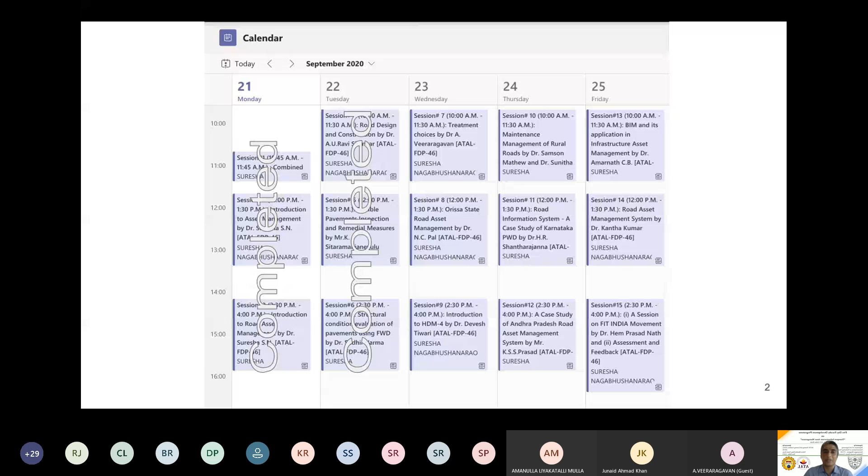So today we have the speaker, Professor Veeraragavan. Dr. A. Veeragavan is currently professor in the Department of Civil Engineering at IIT Madras. He has 4 decades of experience in teaching, research and industrial consultancy. Professor Veeraragavan received the Indian Roads Congress Pandit Jawaharlal Nehru Award in the year 1994 and IRC medals for the best papers in the years 1991, 1993, 1997, 2004, 2008, 2011, and IRC commendation certificates for his highly commended research papers in the years 1992, 1994, 1998, 2000, 2015.

Professor Veeraragavan is a recipient of the UGC Career Award for Young Teachers and the National Award for Promising Engineering College Teacher in India from the Indian Society for Technical Education. He was awarded the Vishwakarma Award under the category Outstanding Academician, Technologist, Scientist, Innovator by the Construction Industry Development Council. He has also received the award for Distinguished Services to the Institute by the IIT Madras Alumni Association. Professor Veeraragavan has published over 100 research papers in journals and over 150 papers in national and international conference proceedings. He has coordinated over 15 major research projects with a budget of over 12 crore Indian rupees.

Currently, he is coordinating, networking with 10 academic institutions, 2 major research projects sponsored by NRIDA on performance evaluation of rural roads with cold bituminous mixes and performance evaluation of rural roads with waste plastics and bituminous mixes, with a total budget of rupees 291.2 lakhs. He has co-authored 4 books on surveying, highway engineering, highway materials and pavement testing, that is 5th edition, by Messrs. Nem Chand and Brothers, and pavement design, pavement drainage, theory and practice by CRC Press, Taylor and Francis Group of UK.

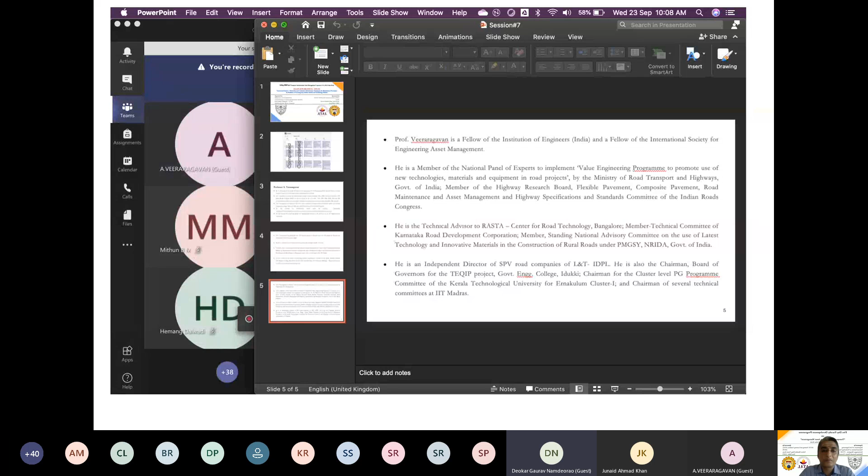So now you can share the screen, sir. Yeah. Are you able to see my screen? Not yet, sir. You may need to minimize the window. Maybe a few minutes back you tried, sir. The same way.

Yes. Oh. Yeah, we can see, sir. Now the slideshow. Is it okay? Yes, sir. Okay. Can I start? Yes, sir.

Yes, sir. Okay. Very good morning to all participants. I'm happy that the importance of road asset management is recognized in the country. All these years we have been constructing the roads, but we were forgetting about how these road assets should be maintained and preserved, so that they will serve the intended purpose.

So the major difference between pavement design and pavement maintenance and management is that in pavement design, we consider a design life. For example, the design life for a bituminous pavement can be 15 years or 20 years, depending upon the category of the road. And for a concrete pavement, it's about 30 years. So the question arises, what is this design life I am talking about?

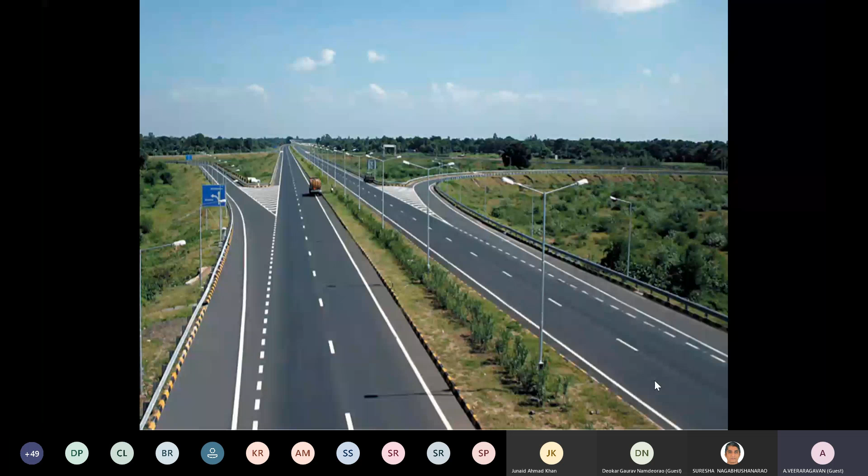Similarly, we do have beautiful highways. Again, this is between Chennai and Bangalore, Krishnagiri, constructed by L&T. We do have beautiful highways like this. Even rural roads are very good today. As you know, a flexible pavement consists of different layers, starting from the embankment, subgrade, subbase, base course, binder course, and the wearing course.

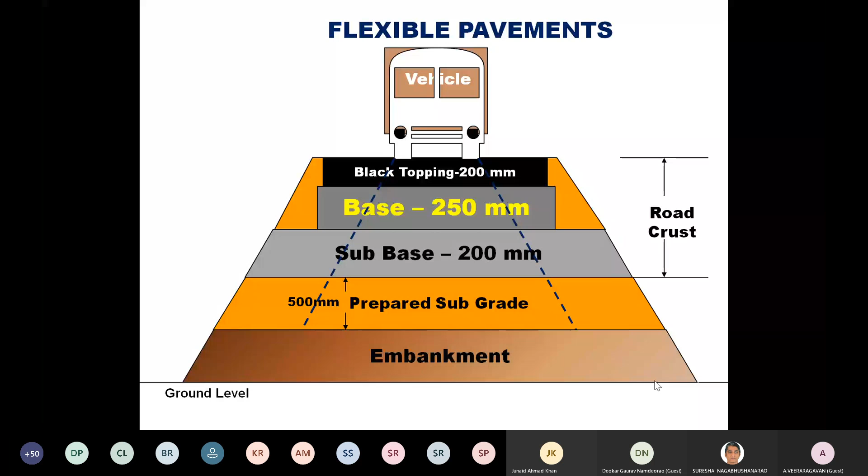What I'm going to talk about today is not the lower layers, the embankment, subgrade, subbase, or base course. I'm not going to talk about those. What I will talk to you about today will be only the blacktop or the bituminous layers. Even though it looks to be one blacktop, this again consists of two different layers. You have a binder course and you have a wearing course. Even though when I say blacktop, both look black, the bottom layer has a different function. The top layer has a different function, even though we call it the blacktop. The function of the bottom layer is that it should be subject to more fatigue.

So you should be able to resist the fatigue, so the material should be more flexible. Whereas the top layer that you provide should be stiff enough because the stresses are coming on the top here. So this load stress gets transmitted to the binder course, to the base course, to the subbase, and to the subgrade eventually. So the function of the top layer should be to resist the high load, higher tire pressure, so that rutting will not take place. So the top layer should be a rut resisting layer, and the bottom layer should be a fatigue resisting layer.

But you will find in pavement materials characterization or in pavement design, they consider the same modulus for both the layers. They consider both materials to be the same. They are considered to be HMA, hot mix asphalt, but the functions are different. As can be seen here, the top layer is a rut resisting layer and the bottom is a fatigue resisting layer. So we consider the bottom radial tensile strain as the criterion to resist the bottom-up crack.

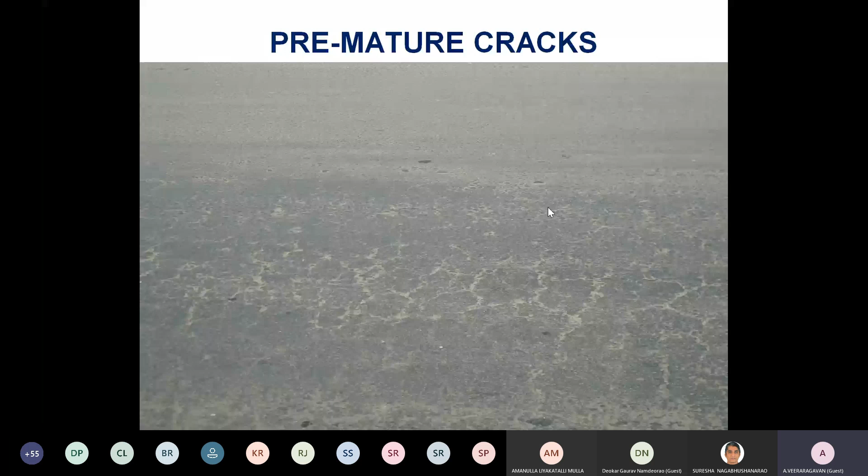This crack will not be a bottom-up crack. You can ask me a question, how do you know that this is a top-down crack and not a bottom-up crack? What you should do is take a core. Once you take a core, you'll find the cracks are confined only to the top, maybe 10, 15, 20, 30, 40 millimeters, beyond which the cracks are not there. You'll see the crack here, take a core, find the cracks are only here.

So why I'm bringing this up is that all cracks are not alligator cracks. All cracks are not map cracks. So all cracks are not fatigue cracks. This may be because of the aging of the bitumen on the top. Maybe because of higher load, higher pressure. That means the treatment to a pavement which has developed a bottom-up crack is different from the treatment to a top-down crack.

So ideally, once you find the cracks, you can seal the crack, but that will prevent the entry of water. Once the water enters, because of hydrostatic pressure that's coming on the surface, it will strip off the bitumen from the aggregates, and then that results in the forming of potholes and other distresses. So this becomes a candidate project for recycling.

What I will do is mill the layer up to the depth to which the crack has propagated, maybe 30 millimeters, 40 millimeters, 50 millimeters. I can recycle the material, rejuvenate it, and lay it back. That way, I am making use of the already constructed or used aggregate and binder. Some binder would have aged. Now I have to rejuvenate the bitumen, and then I can lay it back.

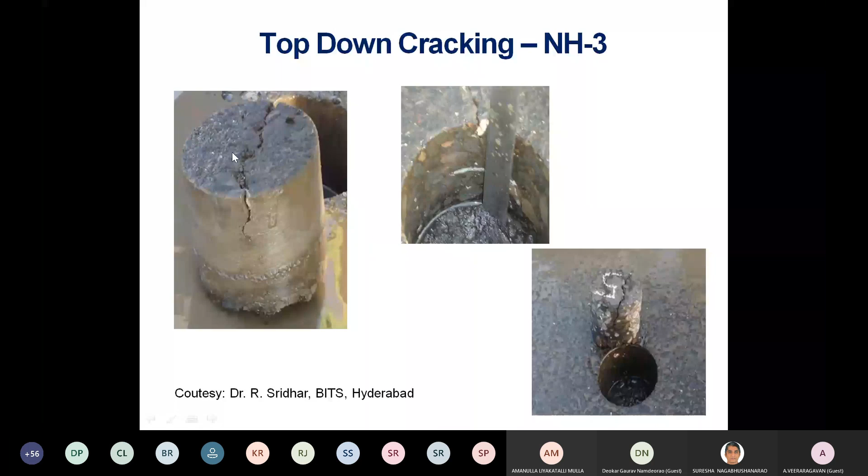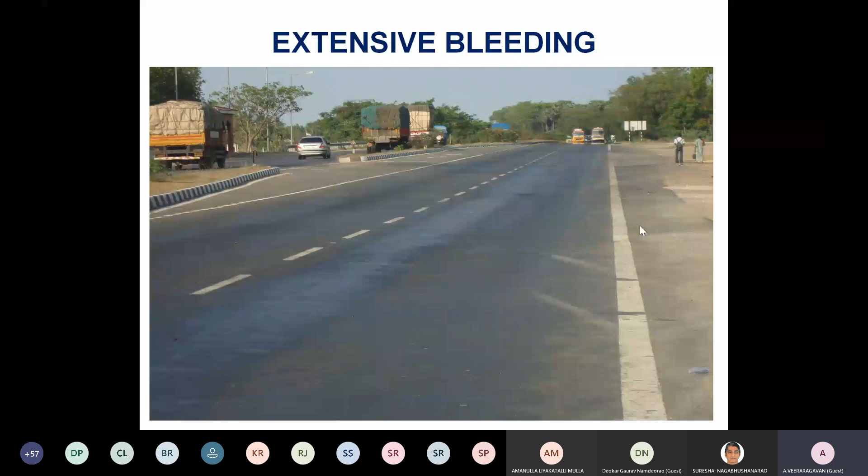All these distresses which I'm showing are before the end of the design life. This again may be because of the binder, maybe because of the density and voids in the bituminous mix, maybe because of overloading. Many factors will contribute to extensive bleeding on the surface. You will also find shear deformation. This is in a ghat section between Krishnagiri and Salem in Tamil Nadu. It's a ghat section, climbing lane. You'll find that the aggregate mixes have sheared off. So what mix is to be used? That is the treatment. What treatment should I do for this is what we will see today.

Also, this is the fatigue cracking which I'm talking about, because of excessive radial tensile strain at the bottom of the bituminous layer. Fatigue cracking can occur. So in a nutshell, a pavement which is good or excellent initially will start deteriorating with the passage of time, with the passage of traffic. The rate of deterioration of the pavement is slow initially for a few years. Then it starts deteriorating, and the rate of deterioration becomes faster beyond a certain stage.

So the treatments that you can consider to maintain the road are, first, preventive maintenance. Then comes minor rehabilitation. Then comes major rehabilitation. Then comes reconstruction. When you do maintenance to your pavement in a good structural condition, it is called preventive maintenance. When the pavement condition goes from good to fair, then it needs a minor rehabilitation. Minor in the sense, thickness less than 40 millimeter. Beyond that, when the pavement starts deteriorating, it warrants a major rehabilitation, which means thicker than 40 millimeter. What material, we'll see that.

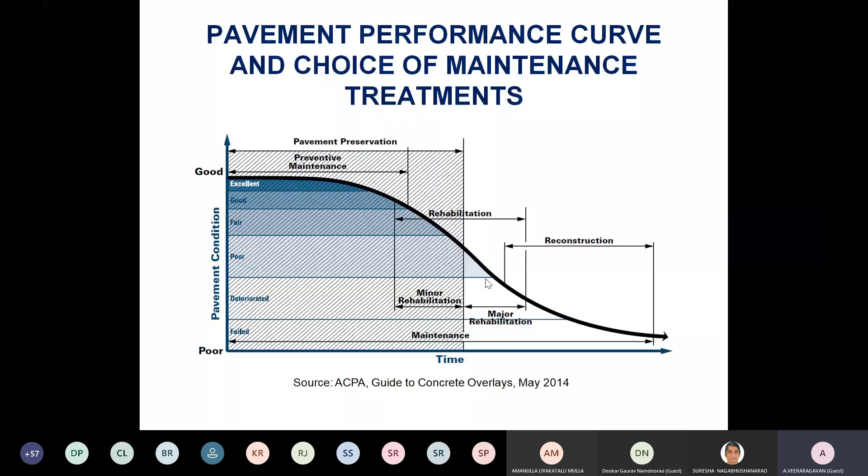When you talk about the bituminous mixes and bituminous layers, they have to serve different functions. Number one, they should offer a high resistance to deformation. So that's what we are talking about. The top layer which I am providing should be able to withstand and offer resistance to deformation. It should be a rut resisting layer. So what is a rut resisting layer? We'll see. Secondly, the layer should be able to offer high resistance to fatigue.

This material should be able to withstand high strain values, where a truck may carry 8 ton, 12 ton axle load, 14 ton axle load, 20 ton axle load, 28 ton axle load. So the strain values become more. With heavier and heavier loads, more is the strain and lesser is the life. So for bituminous layers, one should be able to withstand the deformation. They should be able to withstand the fatigue. And you should also be able to reduce the stresses as you go below. Fourthly, the top layer, when it is exposed to the atmosphere, the top few millimeters of the layer will become aged, become stiff. And when you apply a heavy stress on that, this layer will start developing cracks.

That is a top-down crack which I am talking about. Because of environmental factors, the layer will be subjected to degradation and can develop a crack. And most importantly, this layer should not let the water go through, which means this mix should be a dense graded mix. A well-graded material should be provided as much as possible. One exception is a gap graded mix.

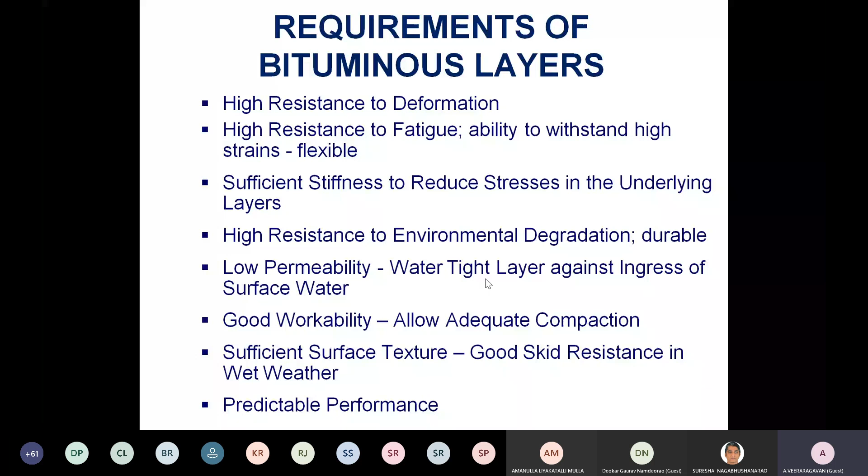As the pavements start deteriorating, what I do here is preventive maintenance. Later I do maintenance and rehabilitation. This preventive maintenance has different types. I'll touch upon what the different types of preventive maintenance are. Initially, for a highway pavement, we do routine maintenance. Routine maintenance is supposed to be done all through the year, 365 days. Now, they don't do it, that's a different issue.

Routine maintenance includes crack sealing, filling up of the potholes, shoulder dressing, and drain desilting. These works are to be done all through the year, which is called routine maintenance. Even though you do routine maintenance, because of wear and tear, some potholes may form, some raveling may take place, which means a pavement has to be resurfaced. So that is resurfacing. Remember, routine maintenance and resurfacing will not improve the structural condition of the pavement. Even though you do the resurfacing, because of fatigue effects and other parameters, the pavement will warrant a minor rehabilitation. Minor in the sense a 40 millimeter thick treatment. So that is a minor rehabilitation.

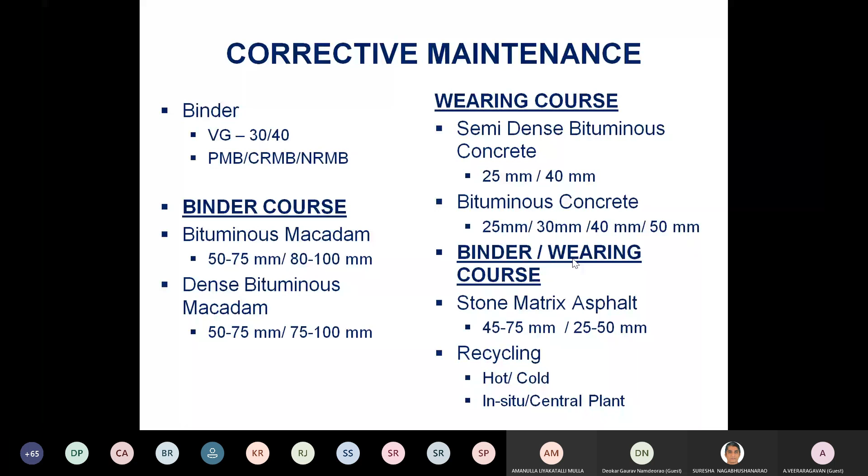In addition, when you find top-down cracking or raveling, you can go in for recycling. It's again a corrective maintenance treatment, which can be hot mix or cold mix. Again, it can be done in situ, or it can be taken to a central plant, mixed, and brought back. So these are the choices of corrective maintenance treatment available to you.

Generally, in a granular layer, there should be two aggregates, one above the other. But in the case of dense bituminous mixes, we require a minimum of 3 aggregates, one above the other, preferably 4. So if T is the thickness of a given layer, the maximum size of aggregate can be T by 3, preferably T by 4.

So once you reduce the aggregate sizes, surface area becomes more, binder contents become more. So what is the issue here? When you have a 75 millimeter thick layer with a nominal maximum aggregate size of 37.5, only 2 aggregates can be there, one above the other. The mix cannot be a dense mix. Therefore, you will find segregation problem in the case of DBM grade 1.

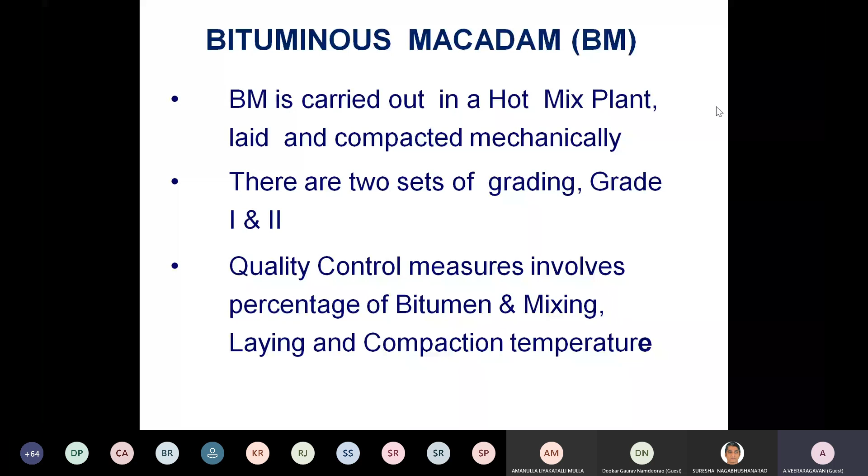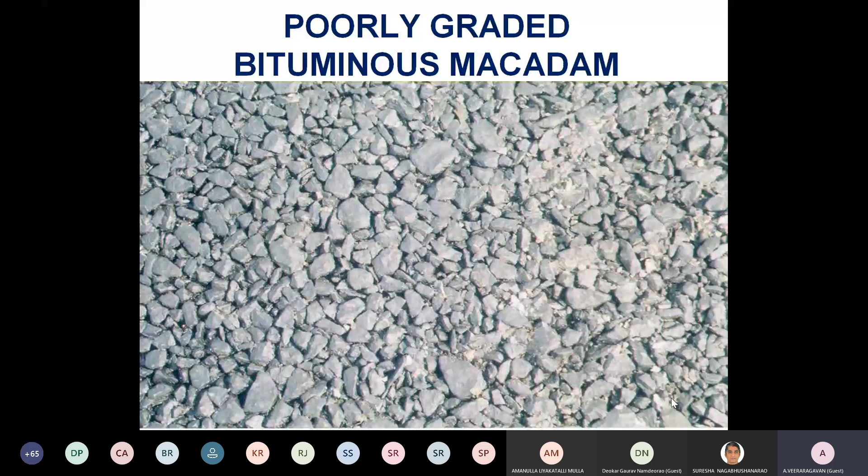BM is carried out in a hot mix plant and compacted mechanically, but unfortunately there is no mix design. The check is only on gradation and on the binder content. Binder content is low, 3.3 to 3.4. So people prefer this, but the voids are more. Imagine a bituminous mix with more voids. You take a glass of water and pour it on this, and the entire water will get in. That is not a good mix. So you will not get a dense mix if you provide a bituminous macadam. You'll find that the voids may be of the order of more than 10%.

This is grading 1. Even when you take grading 2, the voids become more. Therefore, even if you consider load carrying capacity, assume that I apply a load and measure the strain here. When you compare the load distribution within this, because of too many voids, they are not effective. So if you look at the equivalency, then you'll find that instead of providing 150 millimeter of a water bound macadam or a granular layer, you may have to provide 10 centimeter of a bituminous macadam. It's not cost effective. The cost of this will be more than 5,000 to 6,000 rupees per cubic meter. So why Indian roads are bad is because we adopt these open graded or high void mixes.

So what is to be done? We have to go in for dense bituminous layers. So DBM layers consist of coarse aggregate, fine aggregate and filler. There's a mix design. Binder content is fixed. Minimum values are prescribed. There is a volumetric analysis. There's a test on moisture susceptibility. With this result, instead of a BM, you can go in for a dense bituminous macadam. It's usually used as a base course or a binder course.

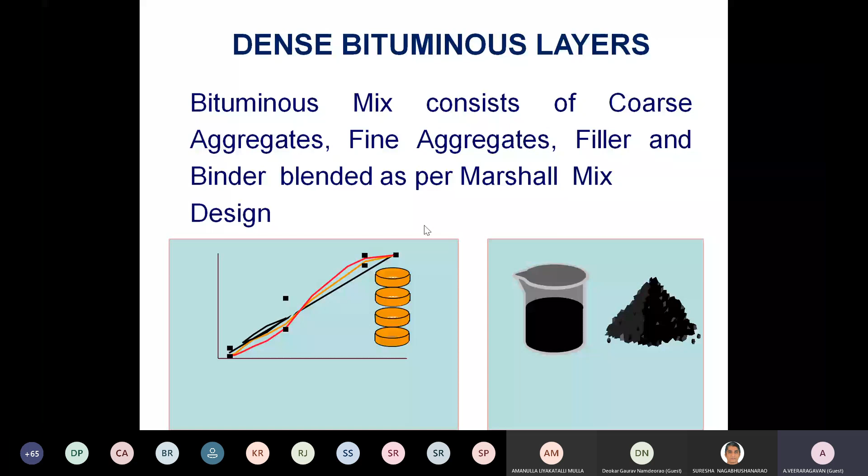And whenever you want to provide a profile corrective course, for example, I have a 2-lane highway. It has a camber on both sides. Now I want to convert this 2-lane into a 4-lane, which means I'm making this into a unidirectional camber. In that case, there will be a wedge. What material will you use to fill the wedge? If you ask an engineer, he'll say, I will use BM. But the BM that you're going to provide will be like this. All the water that gets in near the median will get accumulated here, and that causes premature cracks on the surface. Therefore, the profile corrective course should only be dense bituminous macadam.

It can be constructed in single layers or multiple layers. Thicknesses vary from 50 millimeter to 100 millimeter. Again, it is closely graded. Used as the binder course for heavily trafficked highways. We use cement or lime.

Out of these two, the added value of cement is very, very less. It's not that mandatorily you should use cement. But if the aggregate has got a water absorption slightly higher, to prevent stripping, you can add hydrated lime. If we add minimum 2% lime, the performance of the bituminous mix will be much, much better. So hydrated lime can be used if the mix fails to meet the water sensitivity requirements.

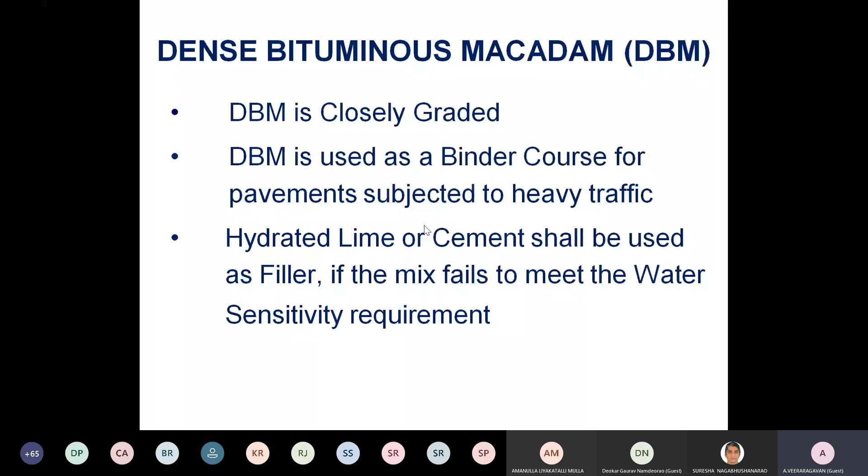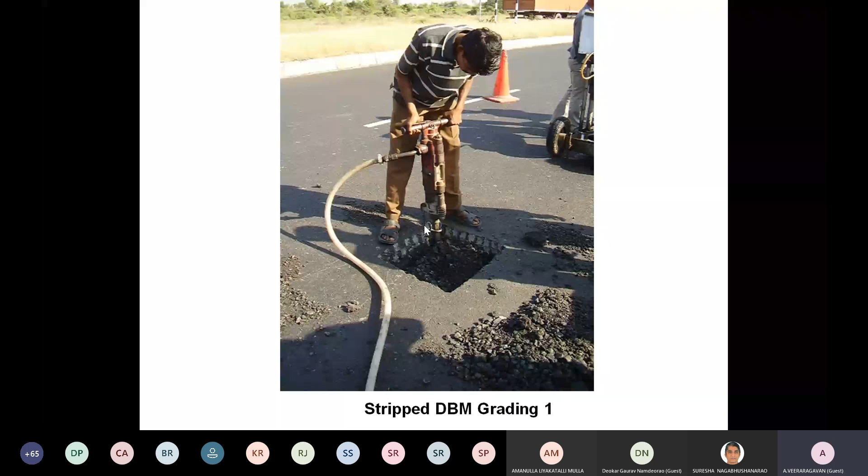So that's what I was telling about the DBM grade 1. Again, a lot of segregation can occur. Take a glass of water and pour, the water will get into this DBM layer. Therefore, whenever you try to find a premature failure, you take a core from that, take a cut, make a trial pit, and then you'll find that there is no bitumen on the aggregates where they have gone. This again is an indication of too much segregation. Water gets in because of the pervious mix in the top layer, and you'll find that aggregates look like granular layer. Extensive stripping will take place.

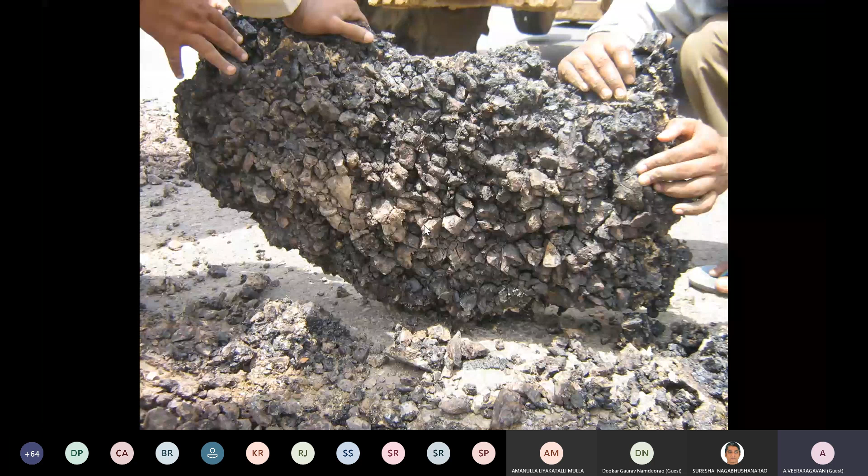Therefore, to make life simple, you can consider DBM grade 2 to be the preferred binder course for highly trafficked highways. Again, the in-place voids, to what voids I should compact. So if you have got 25 millimeter, 19 millimeter aggregate, the void is 8%, you'll find that permeability is of the order of 1200 plus. So gradation, nominal maximum aggregate size, and the in-place voids play an important role on the permeability of the mix. Therefore, DBM grade 2 can be considered to be the treatment choice for the binder course.

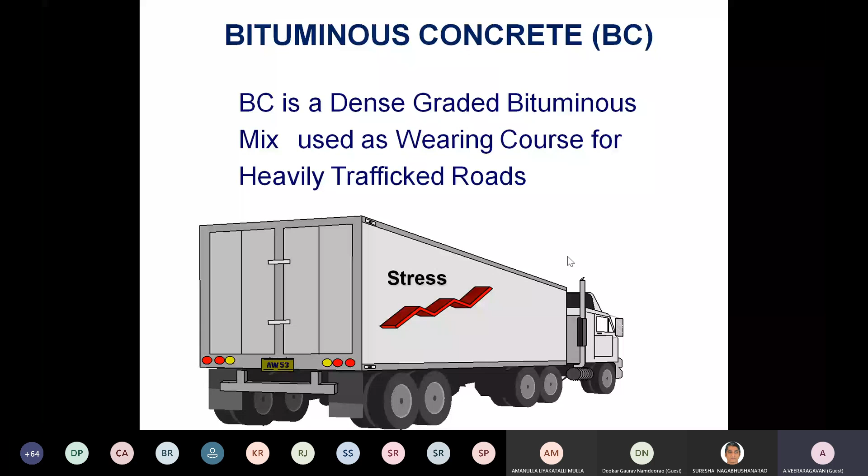When it comes to a wearing course, we can go in for a bituminous concrete, which is again a dense graded bituminous concrete, a wearing course for heavily trafficked roads. The quality control involves the mix design to be done. Gradation is there. And as I was mentioning earlier, you have fixed gradation for the BC, binder content 5.2 or 5.4. We can do the mix design in the laboratory, check the optimal binder content corresponding to 4% voids. We can check the mixing, laying, compaction temperature. We can check the density, stability, flow, voids, retained stability, binder content, gradation. Therefore, it is possible to ensure a better quality construction if you adopt such dense graded mixes like bituminous concrete.

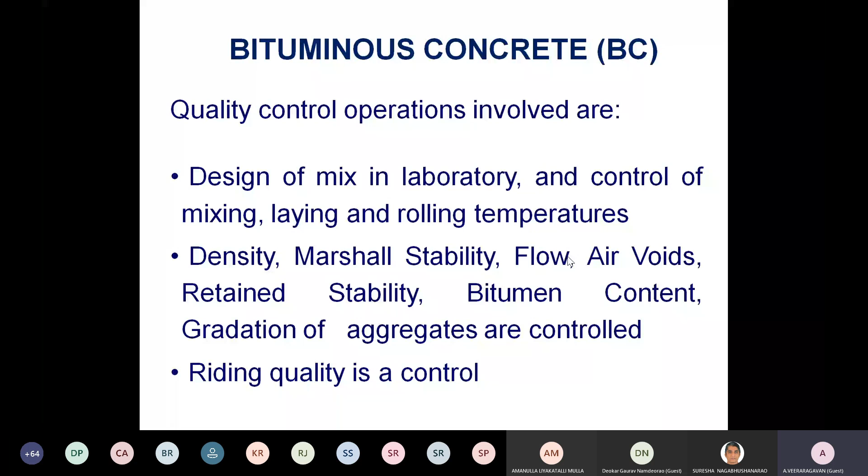Riding quality is also important here. Even though the ministry has deleted the semi-dense bituminous concrete up to 10 MSA, we feel that we can still adopt semi-dense bituminous concrete. The Indian Roads Congress specifications are still available for SDBC. So I also feel that for low volume roads like rural roads, where the traffic is of the order of 5 million standard axles, 2 million standard axles during the design life, SDBC can be laid directly over a wet mix macadam as the wearing course of thickness 25, 30 or 40 millimeter, and this will be much better than open graded mixes.

So there are requirements of the volumetrics as well as the requirements of the mix. The minimum value of stability is 9 kilonewton, and if we use a modified binder, it should be 12 or 10. Flow values, Marshall quotient, air voids 3 to 5, approximately 4 is the average that we consider. Similarly, voids in the mix also play an important role. So you should do a mix design, select the appropriate gradation, find out the optimal binder content, check the flow, check the voids, and ensure that VFB and VMA also follow the required specifications. If the VMA is too high it also causes problems; it may meet other requirements, but it may not meet the VMA and the VFB requirements. They also are important for ensuring satisfactory performance of the pavement.

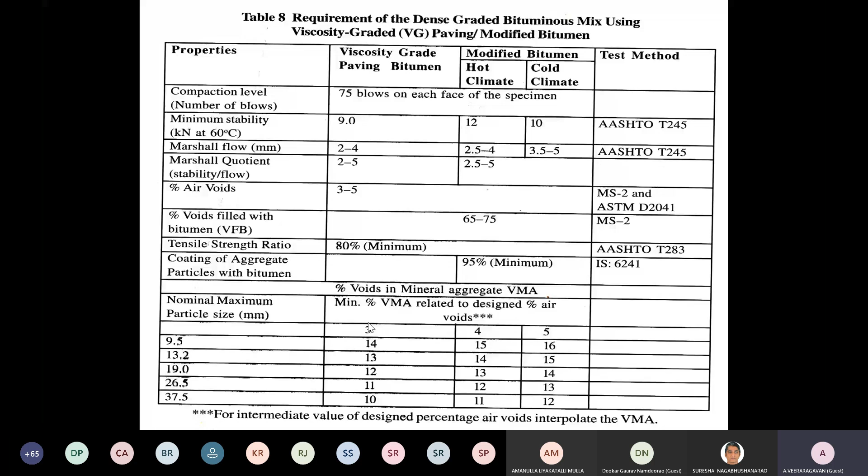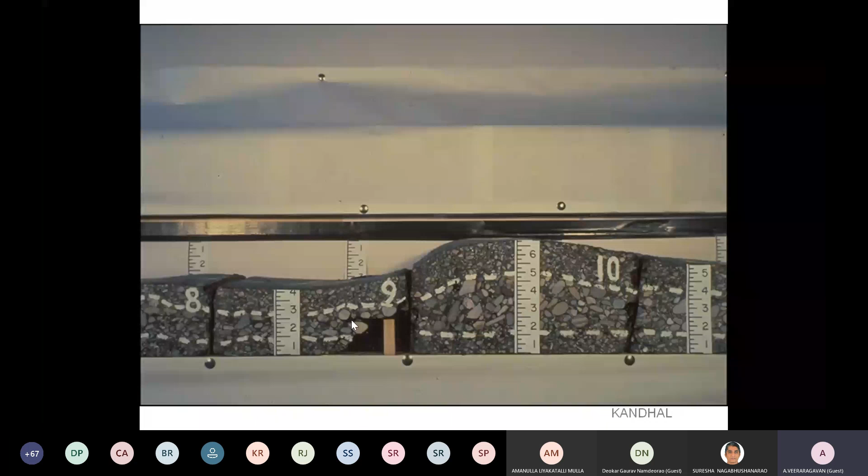So when I say that such shear deformation is taking place in a BC, understand BC will not be able to withstand higher shear resistance. Therefore, we need a different mix to prevent this. Rutting and shoving is also from the same section which I'm talking about, because of the poor bituminous concrete mix. In some cases, if you adopt DBM as the binder course, you can find the top wearing course looks intact, but you'll find the binder course has sheared off. Because of aggregate shapes, you find that they are more rounded, they are not angular. So aggregate shape also plays an important role. If your binder course has too many voids, it can again shear off. It need not be contributed only to the wearing course. Any mix that you construct, if you have too many voids, it will eventually crack.

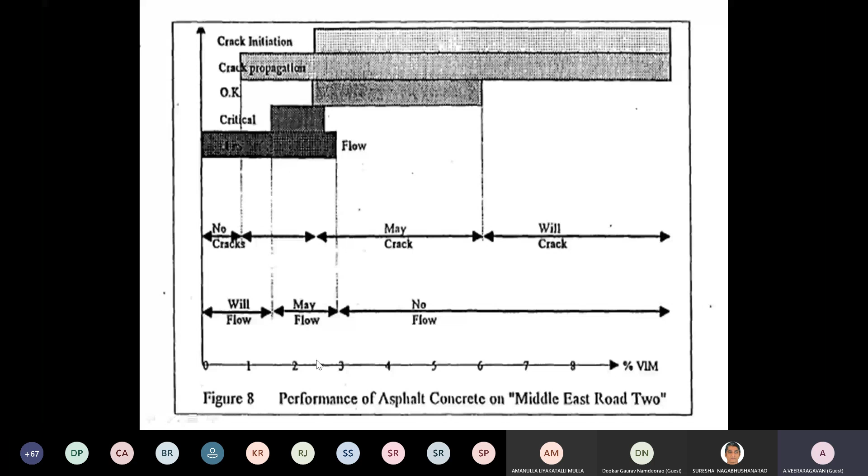Too less of a void, it may not crack, but it will flow, it will bleed. So now you have to strike a balance between cracking and bleeding. You'll find that whenever the mixes had too less a void, it resulted in rutting. Too high a void, there's no rutting, but water can get in and may result in cracking.

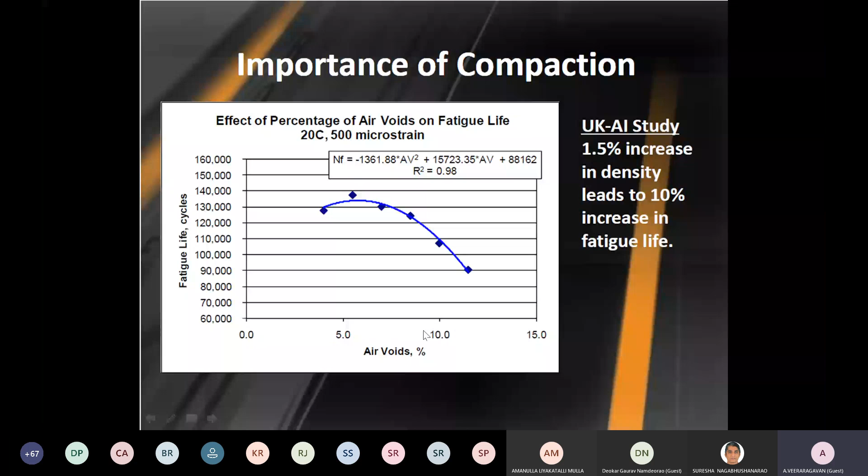Therefore, a hot bituminous mix should be compacted to approximately 7 to 8% voids initially. What I mean is 93% of the theoretical maximum density with around 7% voids initially. So these voids will decrease and you should never go below 4% during the design life of 15 years or 20 years. Compaction plays an important role. So if you find that the voids are around 5%, 6%, then the fatigue life is also more. So don't have too much of voids, that will decrease the fatigue life of the mixes.

Therefore, the solution that we should consider for a wearing course and a binder course is a stone matrix asphalt. So this stone matrix asphalt is a gap graded mix, a rut resisting mix. It consists of high quality aggregates. It has an asphalt rich mortar, mineral fillers, as well as cellulose fibers. When you use this mix, it forms a coarse aggregate skeleton and an asphalt binder rich mortar. So there's an aggregate to aggregate contact, stone to stone contact. With the result, performance will be a rut resistant mix. That's how an SMA will look like.

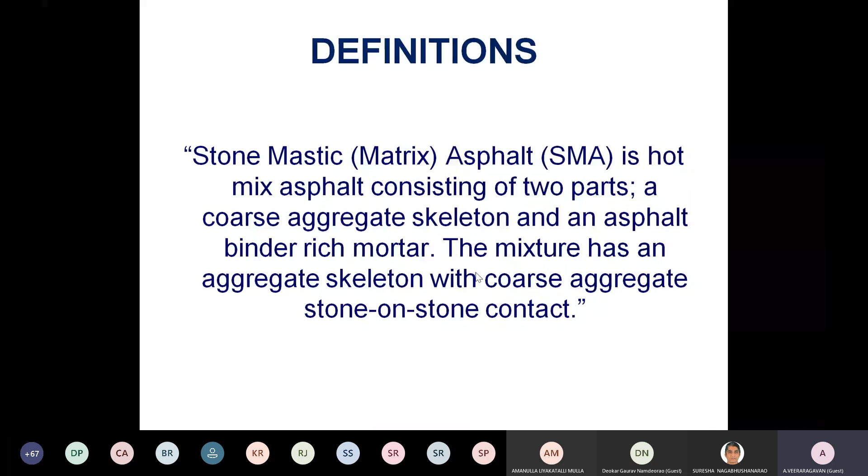So you'll find a rut resisting mix, very high skid resistance, reduced water spray, noise reduction is also possible, and a durable mix. Even in the case of airfield runway pavements, the taxiways where the aircraft crawls at a very low speed and it waits for clearance to take off. When the aircraft leaves the airport to take off, when the fuel tank is full and the load is more, the aircraft crawls along the taxiway and waits for the takeoff. You'll find rutting all along that taxiway. When the aircraft lands, the fuel is already burnt, the load is less. And the exit taxiway will not be subjected to a very heavy load application like the taxiway that is leading to the runway. In such cases, the preferred mix treatment is a SMA.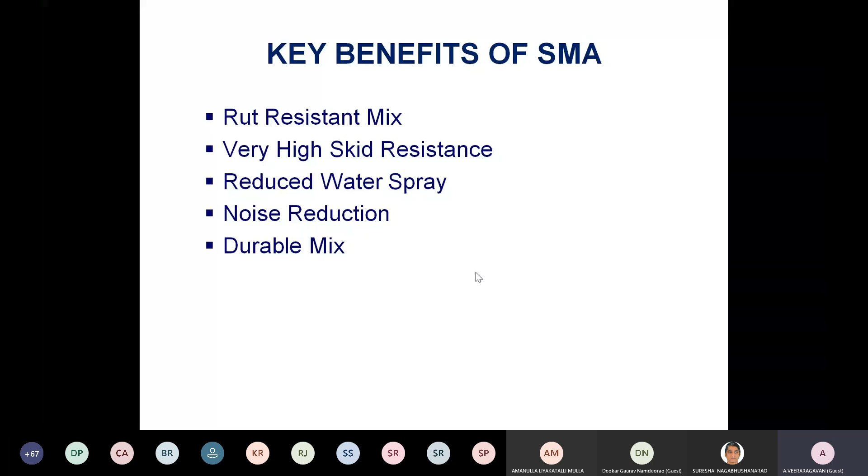Composition, again two gradations, one passing through 13 and one passing through 19. This can be used as a binder course for heavily trafficked roads. There are highways which carry more than 30,000 trucks per day, heavily loaded, going for SMA binder course. If the traffic is less, but still you want a rut resisting mix like the Nagpur Mumbai expressway, where the speed is 150 kilometers per hour, go in for SMA of 13 millimeter with a nominal maximum aggregate size of 13 millimeter. So this is how you have to choose the appropriate treatment.

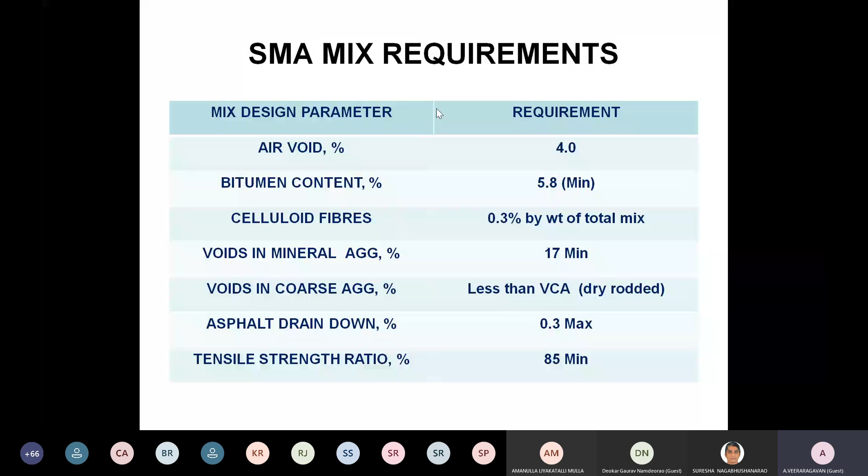The requirements: air voids is 4%, minimum binder content is 5.8%, draindown should be 0.3 maximum percent, and the tensile strength ratio should be 85 minimum. So this is again the requirements. The mix design has to be carried out. So if there is no fiber, all the binder will flow because fines are less. But once you add the fiber, the binder flowing out will be very, very less. Therefore, there is a need to add cellulose fibers to this. That's how an SMA mix will look like.

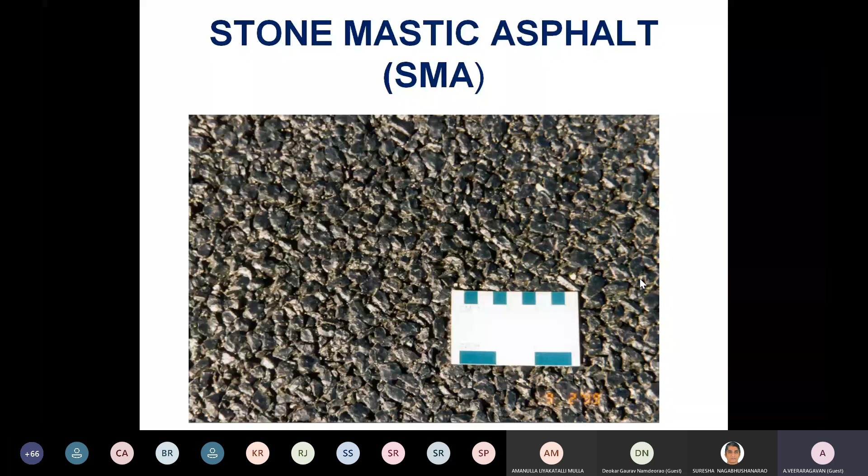So to make life simple, binder course is a SMA grade 2. Surface course can be bituminous concrete, maybe 40 millimeter or 50 millimeter or 30 millimeter. Or you can go in for SMA grade 1 or grade 2 as a binder course or a wearing course. These are the choices available to you for a long lasting pavement. This is how your surface will look like after the rut test.

Now, let us come to thin bituminous surfacing choices. We conventionally use this PMC. It's also called open graded premix carpet, OGPC. When the term itself says it is open graded, then you can ask me, you just now told us you should adopt a dense graded mix, but you're now talking about open graded premix carpet. Yes, why Indian roads are bad is because we adopt such open graded premix layers. It is a single size gradation, maybe 13.2 and 11.2. So if you take a glass of water and pour on this, the water will get into that.

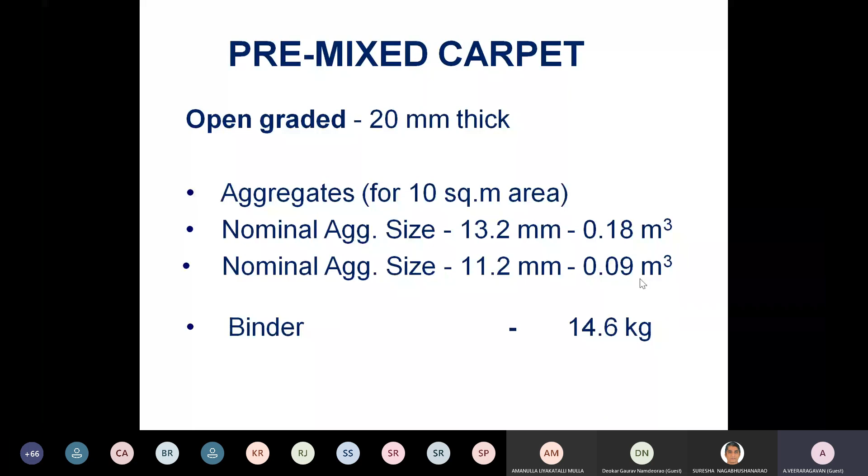That causes stripping. So what I do is that I provide this premix carpet, which is open graded, and cover it with a seal coat. This seal coat can be of two types, liquid seal coat and a premix seal coat. In a liquid seal coat, what I do is that I apply a layer of binder and spread the aggregates on the top. This layer of binder which I apply will serve as a waterproof layer on which aggregates can be spread on the top. For example, you are constructing a road in Mangalore or even in Kerala or in Maharashtra in the coastal region.

Rainfall is heavy. Go in for a liquid seal coat. Don't go in for PMC. If you go for a PMC, go for a liquid seal coat. In other dry regions, you can have a premix seal coat, which is also called a type B seal coat. But remember, premix carpet warrants a seal coat. Both put together is around 20 millimeter.

This is how an open graded premix carpet can be laid, but you will find that all distresses will occur because water will get into this and cause premature failure. No sand seal coat. This is called a grease ring test. You have a ring of grease, pour a glass of water in that, and find out how long it takes for the water to enter.

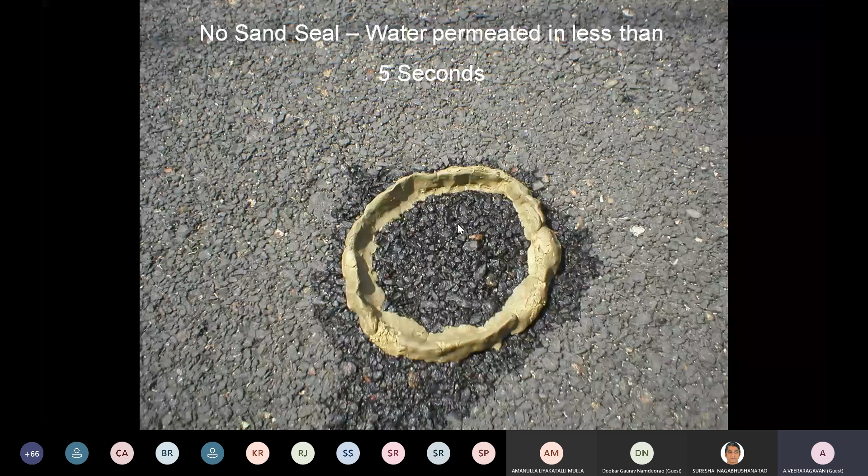No sand seal coat, water will percolate in 5 seconds. On this layer, if you have a moderate sand seal, still water will get in about 30 seconds. If you have a heavy sand seal, the water will percolate in 9 minutes. Eventually, water will percolate. But if you provide a bituminous concrete surface, for hours, water will not get in. So water is enemy number 1, enemy number 2, enemy number 3.

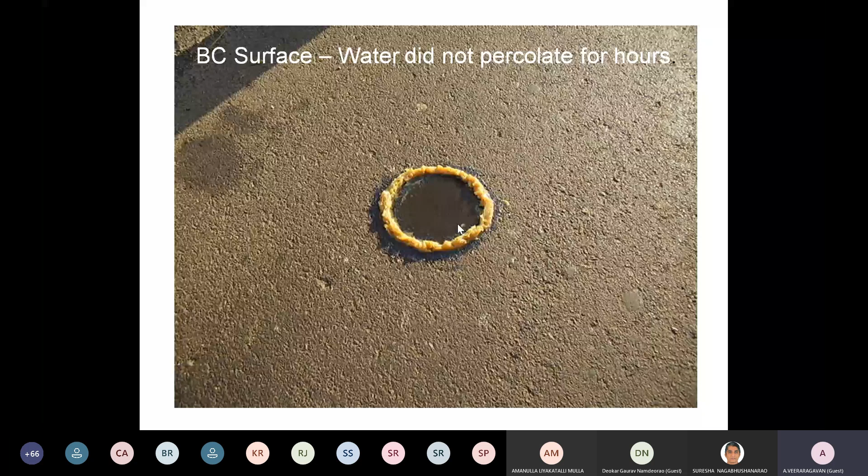So if you do not want water to get into the lower layers, adopt a mix for which there is a mix design. Quality control is possible and it is impermeable. BC mix will fulfill all the requirements. We can also go in for a closely graded premix.

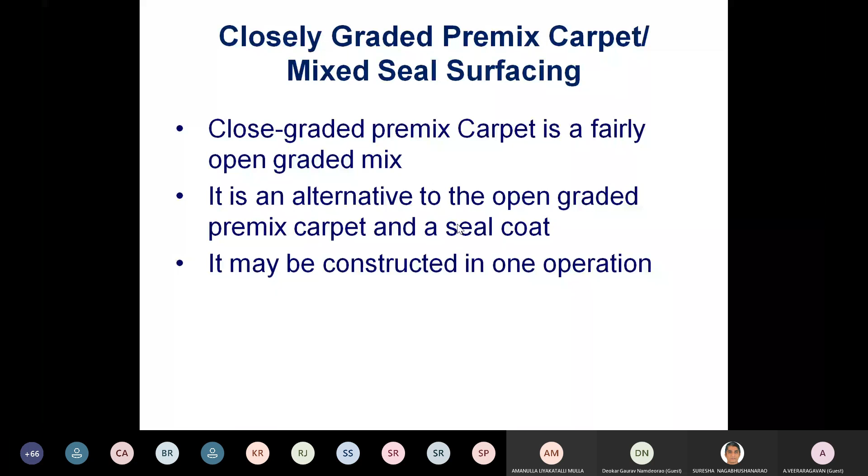I told you open graded premix consists of two different mixes. One is the open graded mix and the other a seal coat. Now you can consider both the mixes as one mix and lay them in one operation. When compared to the open graded premix, this closely graded premix can perform relatively better, but still it's an alternative to the open graded premix. It may be constructed using a paver, with the result that the surface finish is good.

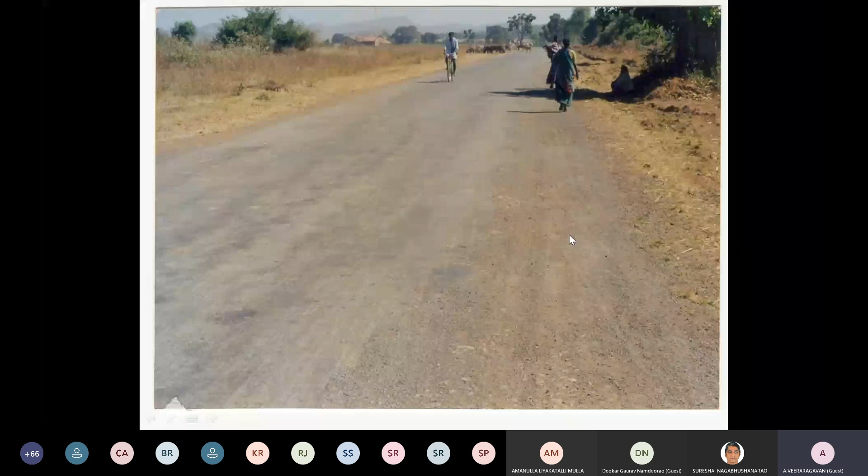There are two types, type A and type B. For 20 to 25 millimeter, you can lay this closely graded premix surface, even though it is not a preferred wearing course. But what I found is that when you have laid a wet mix macadam using a paver, I have no issues in providing mix seal surfacing with a paver. But when you have laid a water bound macadam, the surface is uneven. And if you provide a premix seal surfacing using a paver, at the edges you'll find the thicknesses are very less. Due to wear and tear, they get worn out.

You'll find more distress here. Therefore, I do not recommend adopting mix seal surfacing or MSS directly over a water bound macadam. One thin bituminous layer is required before the mix seal surfacing is laid. But both I would not recommend as the preferred choices of thin treatments. As the pavement conditions start deteriorating, the pavement needs some more preventive maintenance.

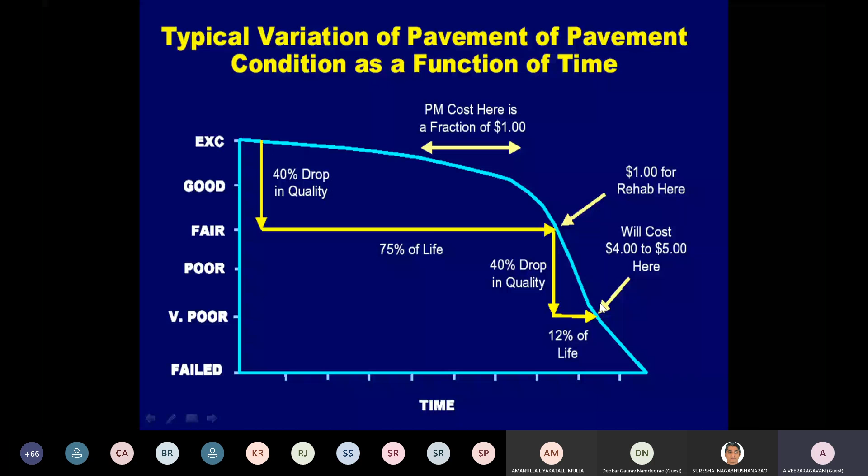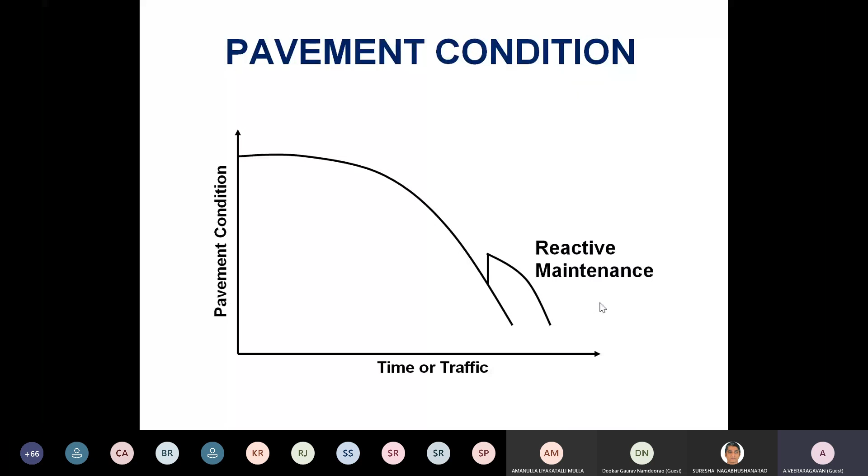If I spend here, it costs 1 rupee. If I delay it more, it costs 4 to 5 rupees. So the more you delay, the more the maintenance cost will be. A stitch in time saves nine. So what are the choices here? For pavements which start deteriorating like this, if I do a treatment later, it is called reactive maintenance or corrective maintenance. It is something like taking antibiotics.

On the other hand, if you do the maintenance earlier, it is called preventive maintenance. It is like taking vitamin tablets. You'll find the health of the road network is much better. Pavement condition, we call the term health. The health here is much better. Very good. Here, health is poor. You are in ICU, but you are consulting a doctor here.

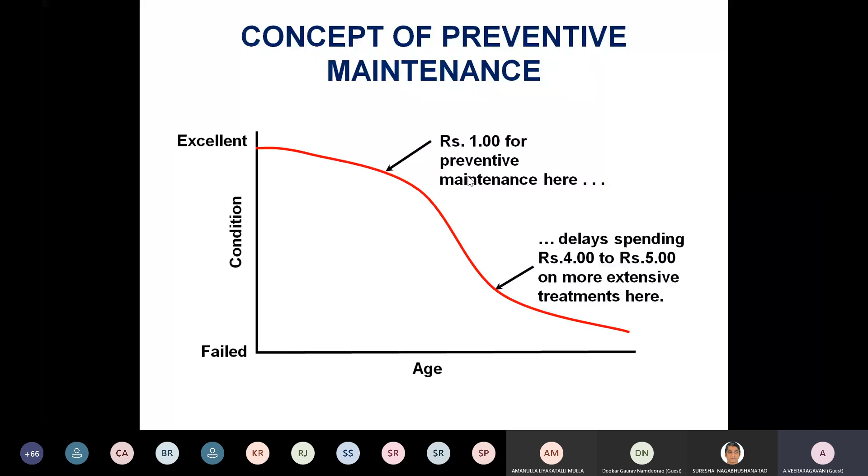So what are the choices of preventive maintenance and corrective maintenance? We saw reactive or corrective maintenance. Let us see, in the case of preventive maintenance, if you do the maintenance here, it is much lower, cheaper in cost, 1 rupee or less than a rupee. If you delay it more, the cost will be 4 to 5 rupees. So by doing the preventive maintenance here, you'll find that the life extends by 2 years. From 10 years, it will reach the fair condition.

Because I am doing a preventive maintenance here, I am ensuring that the pavement performs better. I am ensuring that water will not get to the cracks. I will ensure that the surface does not get aged, so that I do a treatment here because the water is not able to enter into the lower layers. The life extends by 2 years. So a simple cost-effective treatment can extend the life by 2 years.

What are the choices? This can be a fog seal, a slurry seal, a microsurfacing, a surface dressing. Again, a single coat or a two coat. Thin overlays, thickness less than 40 millimeter.

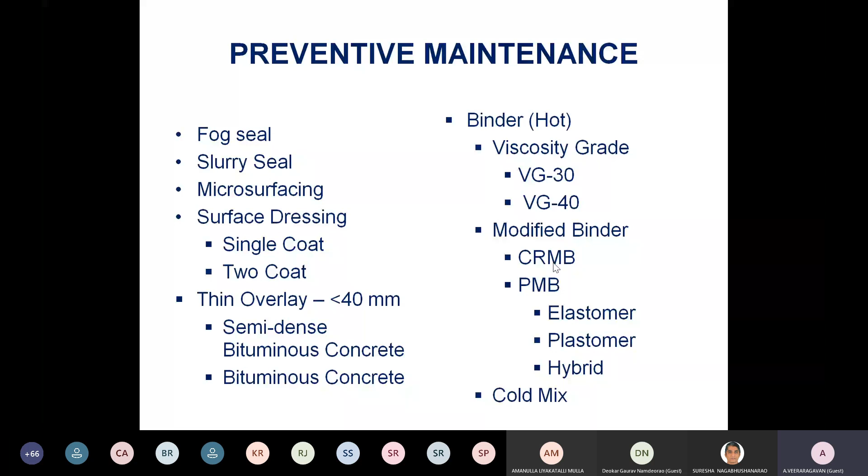Again, semi-dense bituminous concrete or bituminous concrete. Again, the same binders, you can use any of this. So all these treatments which I'm talking about, a fog seal is a light application of diluted slow setting emulsion. What it does is that when the surface is hungry, raveled, it will seal the layers. It will prevent raveling. It will enrich oxidized asphalt layers. It provides a delineation with the shoulders, but it will work only for a pavement in a good structural condition.

Not for undulated pavement, don't apply a fog seal, number one. But more importantly, don't ever apply a fog seal on an expressway, on a national highway, on a runway, because the skid resistance will drastically reduce. Only for low volume roads and low speed highways, if you want to rejuvenate, you can go in for a fog seal. It's a light application of low viscosity emulsion for sealing the cracks. It's a slow setting emulsion we use.

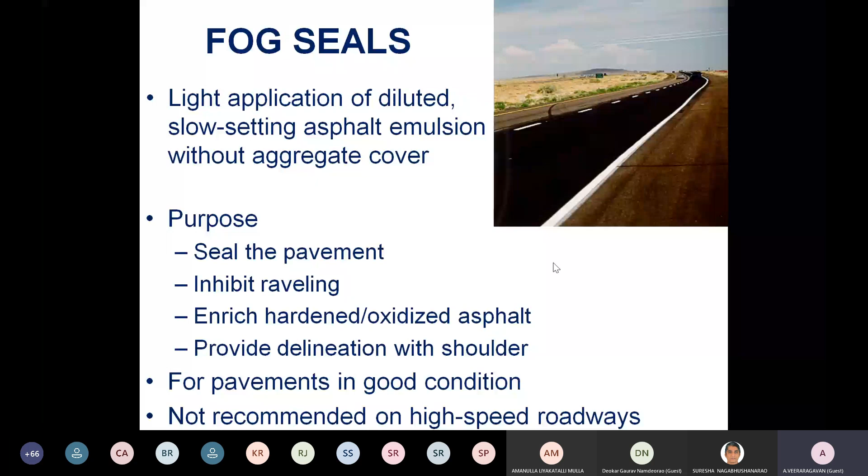You spray the binder at the rate of 0.5 to 1 liter per square meter, and traffic can be allowed after 24 hours. As you know, emulsion is bitumen globules in water. Once the water evaporates, the bitumen settles on the surface. Slurry seal is yet another type of mix, well-graded fine aggregate with a mineral filler. Again, a slow setting emulsion. Thickness varies from 3 to 12 millimeter. It can also be applied to prevent raveling, improve the friction, and to reduce the stripping.

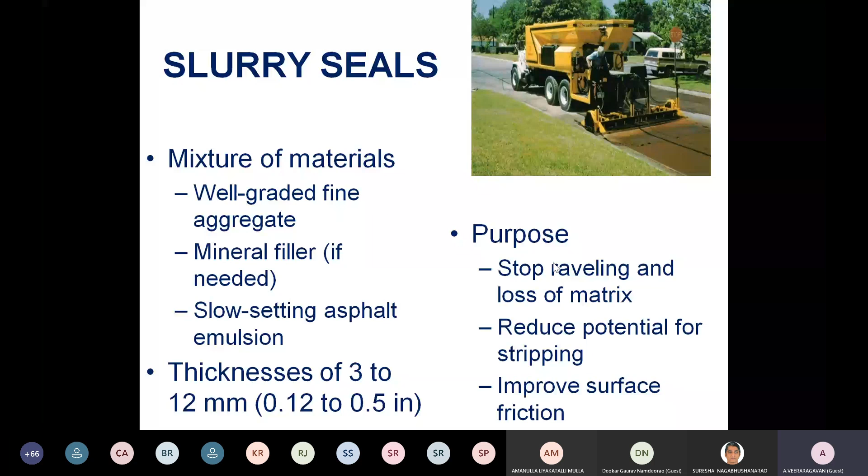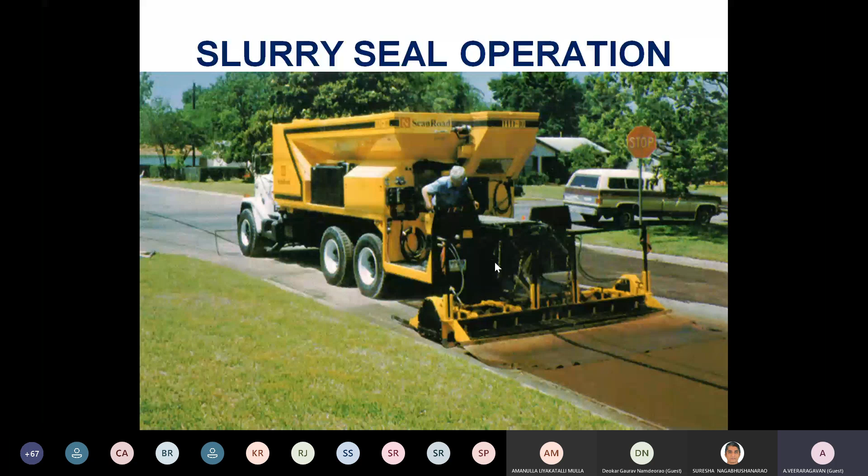So this is a known equipment. It has the fines, it has the filler, it has the emulsion. All these are mixed here itself and laid on the surface. So slurry seal can be adopted for a pavement in a good structural condition but showing surface distresses. Remember, all these layers will not improve the structural condition of the pavement. They'll improve the riding quality, they will seal the cracks, they will ensure that the performance is improved by applying a slurry seal. Microsurfacing I found to be a successful treatment which I can recommend anywhere.

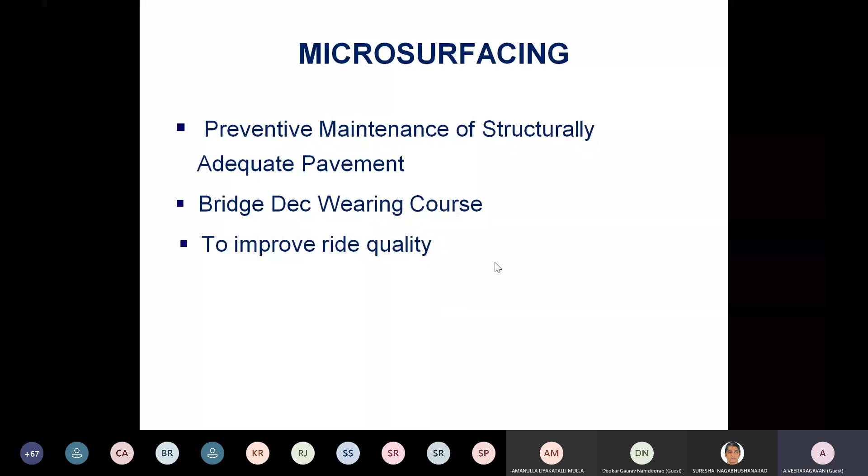Not for high-speed highways, even though they're adopting, but for the majority of the highways, we can go in for microsurfacing. It can also be used for bridge decks to improve the riding quality. It's a mixture of polymer modified emulsion and high quality aggregates. Thickness varies from 8 millimeter even up to 20 millimeter. Again, the mix can give you a riding quality similar to that of a hot mix BC. Cheaper, it may cost around 200 rupees per square meter. It's only emulsion, cold mix, no heating.

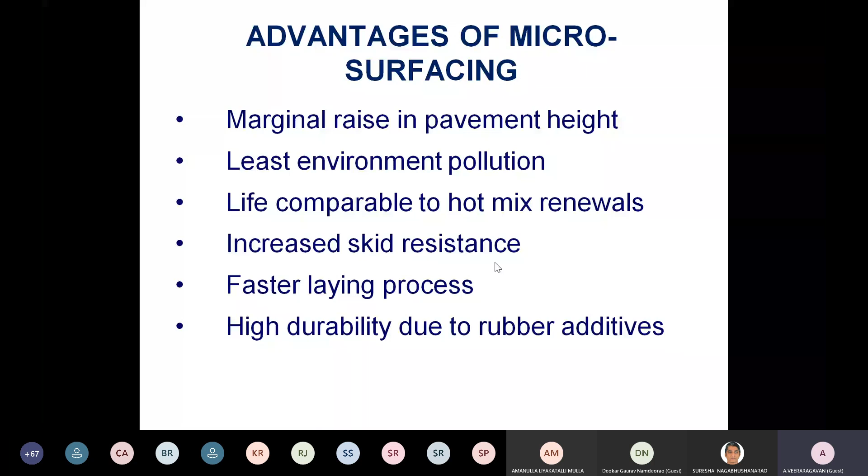So you'll find a perfect smooth riding surface. The life can easily be 3 to 4 years for the majority of the roads. For low volume roads, it can even be higher. So my recommended treatment for preventive maintenance is microsurfacing. Surface dressing is yet another layer which can be adopted for low volume roads. Again, similar to that of the type A seal coat, which I have just now talked about. Stone chippings protect the film of binder. First apply the binder and then apply the stone chippings.

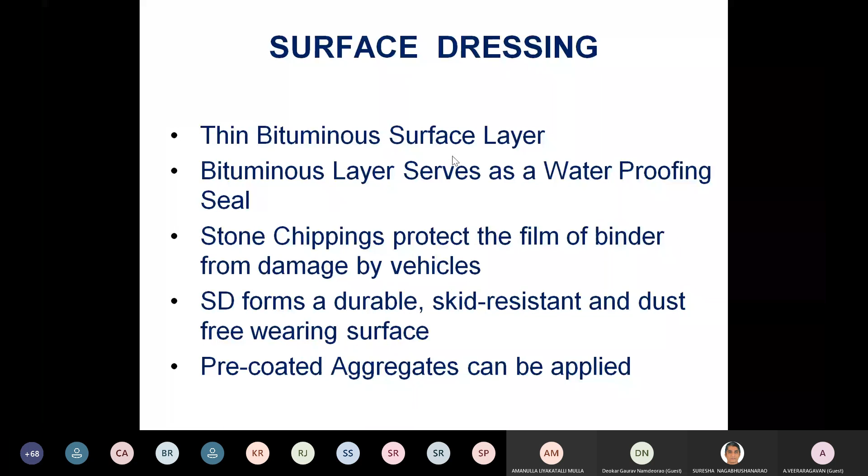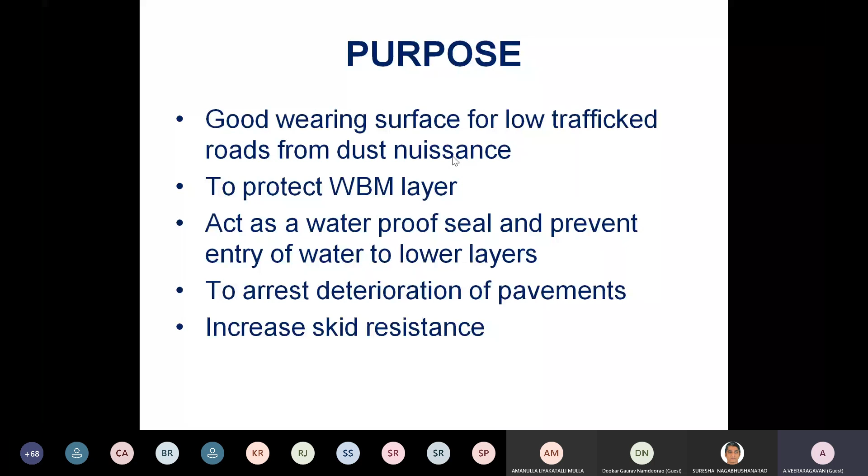So you can also go in for pre-coated aggregates, which means you coat the aggregates with 1 to 2% binder. So the aggregates are already coated, they will bond with the binder layer that you are applying on the surface. Good wearing surface for low volume roads. It protects the water-bound macadam. The binder serves as a waterproof layer. It also prevents the deterioration of the pavement. More importantly, it also offers a high skid resistance. So what I do here is it can be a single coat or a 2-coat surface dressing. You spray the binder, spray the aggregates. Use a pneumatic roller and compact. So here I spray a binder.

This binder serves as a waterproof layer. This is an emulsion. You'll find that water vapor evaporates on a hot summer day. So the binder serves as a waterproof layer. On this binder, you spray the stone chippings uniformly.

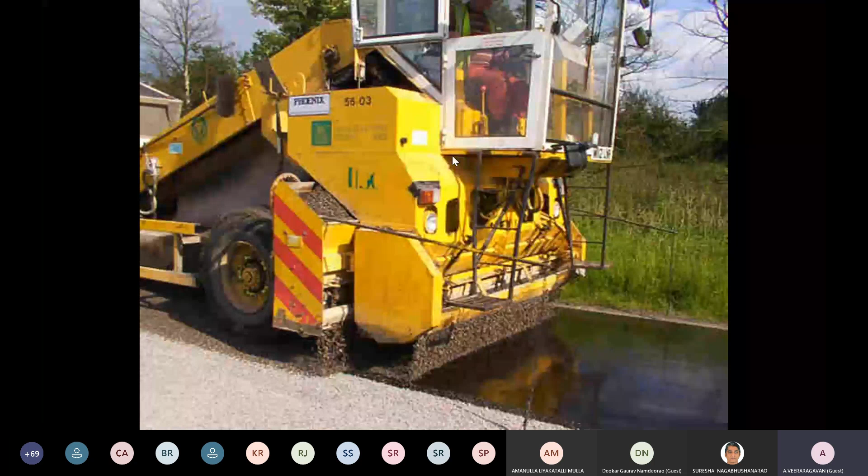And compact with the pneumatic roller. Job done. Cheaper than your premix carpet. Life better than your premix carpet. Then why are you not adopting? Because these chip spreaders are not available in India.

On the other hand, you can go in for a single coat surface dressing, or you can go in for a 2-coat surface dressing, depending upon the traffic as well as the other parameters, rainfall conditions. Low rainfall, low traffic, single coat surface dressing. In the case of high rainfall, high traffic, go in for a double coat surface dressing.

What I do is that on a given surface, I apply a layer of binder. On this layer of binder, I apply stone chippings and compact with a pneumatic roller. That is called a single chip seal or single coat surface dressing.

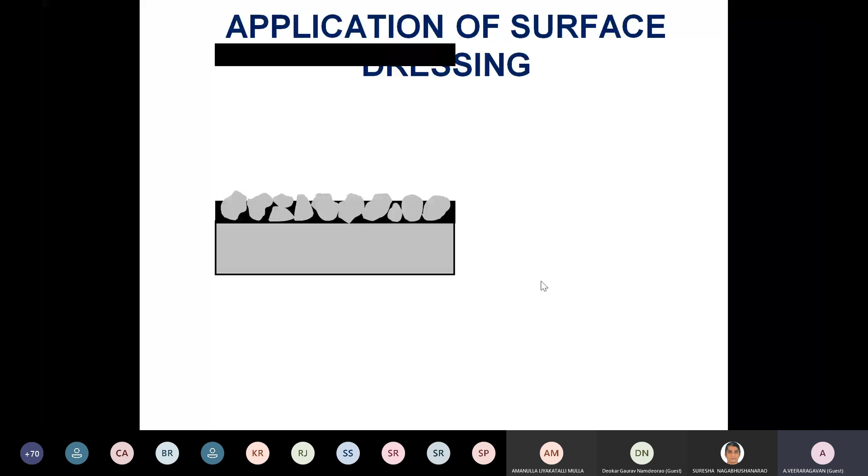On this, I apply the second layer of binder. And then on this binder, I apply the second layer of small aggregates that will key into the voids in the coarse aggregates, and compact with the pneumatic roller. This is called a double chip seal or 2-coat surface dressing.

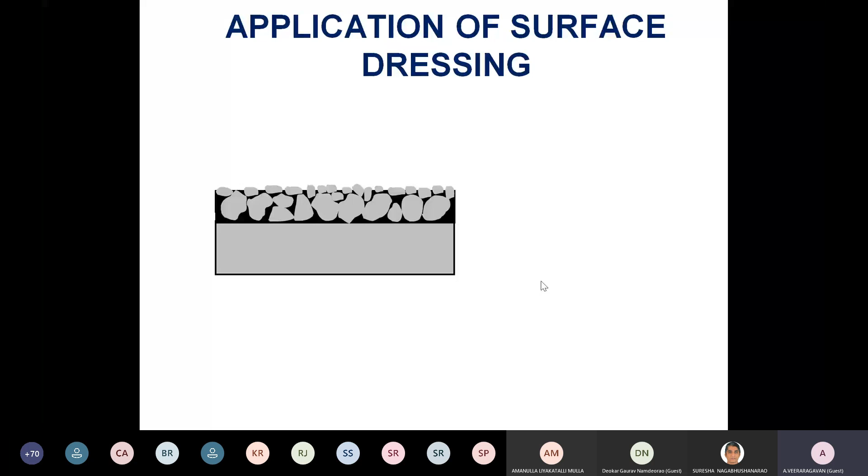High rainfall, high traffic, double coat, 2-coat. Low rainfall, low traffic, single coat. This will be good. This is adequate. This is how you compact with the pneumatic rollers.

These chip spreaders are available from Himakshi in Gujarat. Cost nearly about 2 to 3 lakh rupees, 3 to 3.5 lakh rupees. It can be fitted to any tipper. As the tipper moves, the aggregates can be uniformly spread. So machinery is available. It's only the willingness to use the technology that is missing. But if the binder is not properly applied, there can be a failure of the surface dressing.

Mastic asphalt is another layer, a mixture of bitumen, filler, and fine aggregates, mainly used as a voidless compact mix. The major problem with the bituminous concrete is the shear deformation. Assume, in the case of roads, an intersection or a bus stop where the buses apply a brake, so there will be a shear deformation.

You'll find the shoving, crescent shape movement of the binder mix, maybe because of the tack coat, maybe because of the mix. In such cases, if you want to have a shear resistant mix, you can go in for a mastic asphalt, wherein I heat the mix consisting of fine aggregate, filler, and the bitumen. They are cooked in a mastic cooker to a temperature above 200 degrees centigrade, and then it flows like a liquid on the surface. It is used for heavy duty pavement, city streets, bus stops, junctions, as well as bridge decks.

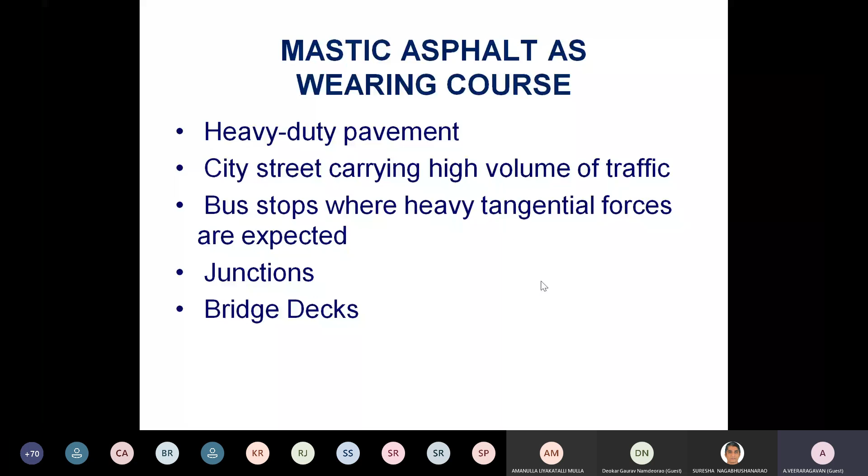But the mix will not have the required skid resistance. Therefore, the ministry recommends spraying of stone chippings on the surface, which you can find in many of the junctions, to improve the friction. So for the roads and carriageways, you can go in for 25 to 50 millimeter. For heavily stressed areas, you can go in for 40 to 50 millimeter as the thickness of the mastic asphalt.

But the bitumen that you use cannot be the bitumen that you use for road construction. This is an industrial grade bitumen with a penetration of 15 plus or minus 5. So 10 to 20 should be the penetration value. So the bitumen should be an industrial grade bitumen. There are other requirements which are given here.

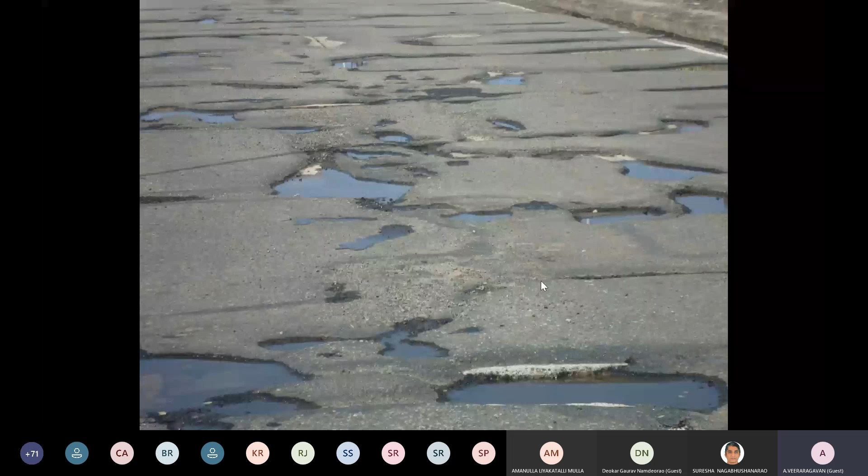This is a bridge in Kerala which was constructed. They constructed it with a mastic asphalt and cemented wearing course, but you'll find it full of potholes. When it came to collecting the toll, people were not willing to pay toll for this pothole-filled road. So how should the mastic asphalt be laid?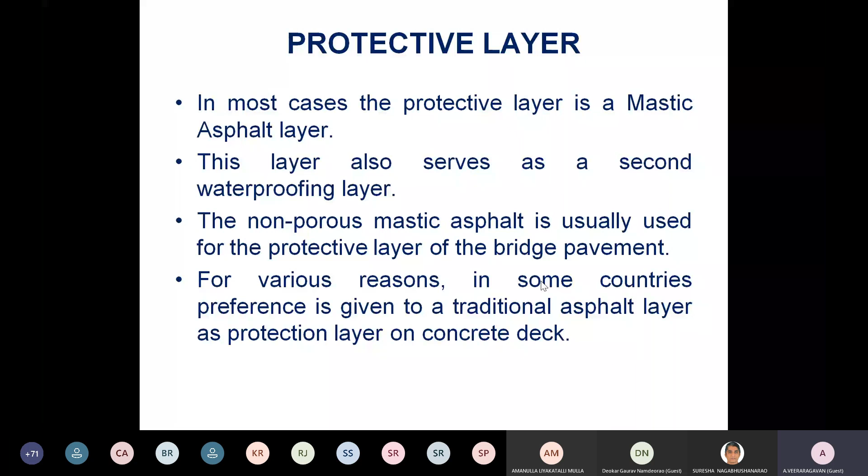Again, there's a miscommunication between the ministry specification and what we people have understood. They provide bituminous concrete at the bottom and the mastic at the top. As I was mentioning, mastic will result in skidding. Mastic should be a binder course, a second layer as a waterproof layer, on which you provide bituminous concrete as a wearing coat, which can be relaid. So in the European specifications, they have a concrete surface.

So above the concrete surface, you have a spray, a primer, bitumen sheet. This is what I'm talking about. Then they suggest a bituminous mastic asphalt protection layer and mastic asphalt wearing coats. So there are two mastic asphalt layers. I say one mastic asphalt, one BC, or it can be twice mastic asphalt with stone chippings on the top. But a bitumen sheeting as a waterproof layer is required.

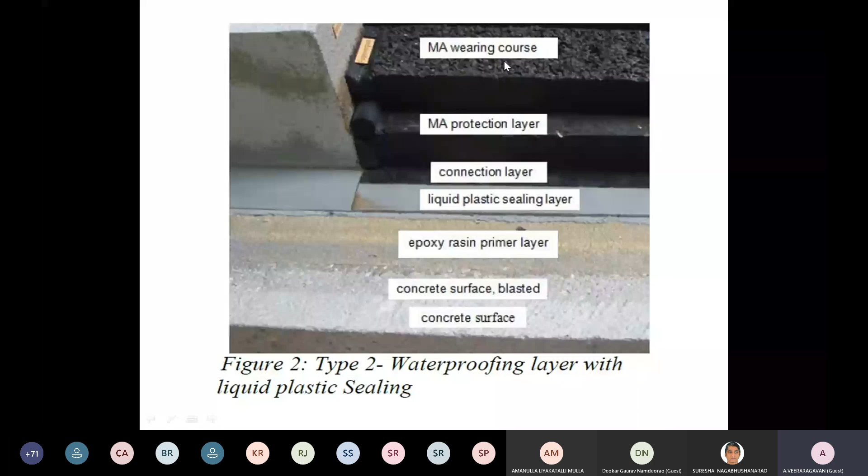This is again the same case: liquid plastic sealing layer, a connection layer, mastic asphalt protection layer, and mastic asphalt wearing coats. In France, they adopt a polyurethane resin, mastic asphalt, and a bituminous concrete wearing surface. But we have to change our specifications in the Indian context for a long-lasting wearing coat on the bridges. Porous asphalt is another layer. I personally feel that open graded friction courses should be adopted.

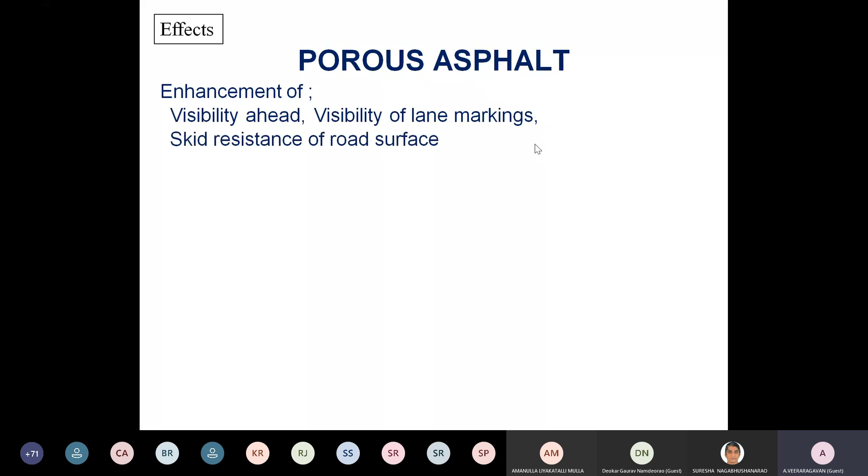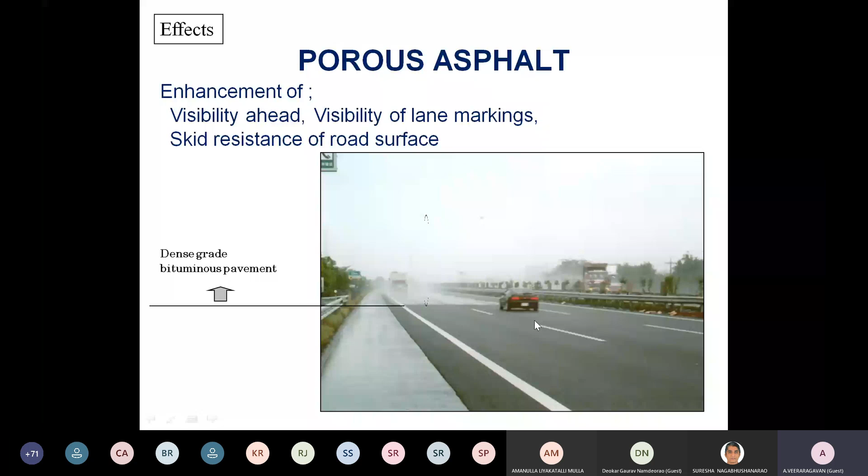These porous asphalts ensure the water drains off from the surface. We are able to see the road visible ahead, and it offers a good skid resistance on the surface of the pavement. So you'll find that when you have a dense mix, there will be a splash of water. But here you'll find that water has got into the layers. So that will ensure that the surface will offer a good skid resistance. The road markings are visible, so it is time that we go in for a porous asphalt. There will also be a reduction in the noise possible.

So this is the preferred wearing course for heavily trafficked, high traffic, high speed highways like the Nagpur Mumbai expressway or any expressway for that matter. You should go in for this open graded friction course. But clogging will be an issue. But you have to remove the water. Even in case of airfield runway pavements, I would suggest that the top layer can be this open graded friction course, wherein all the water will get in, the surface will look dry, and will offer you the required skid resistance.

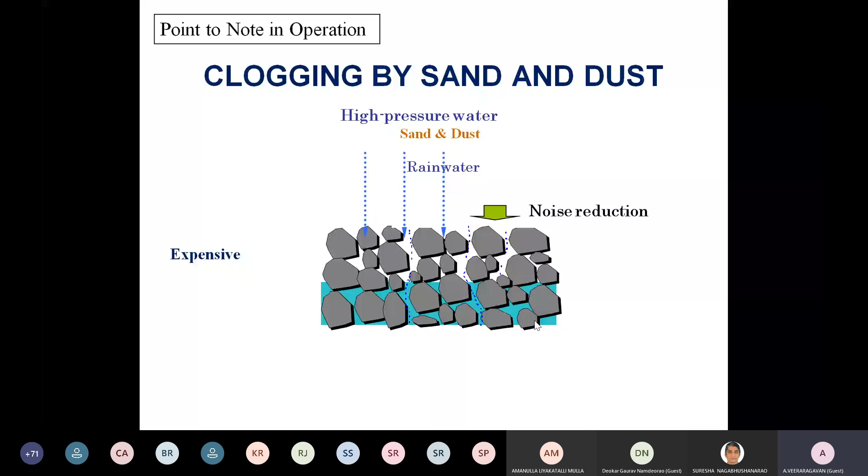So for all roads, before you do the bituminous layer, the surface has to be prepared. You have to remove and replace the failed areas. You have to patch all potholes, seal all the cracks, fill all the ruts. To ensure that, the profile corrective course is done using a dense graded mix, and you have to clean this with a mechanical broom. So this is what I was talking about, the wedge. This wedge should not be with the open graded mix like a BM. This wedge should be a dense graded mix.

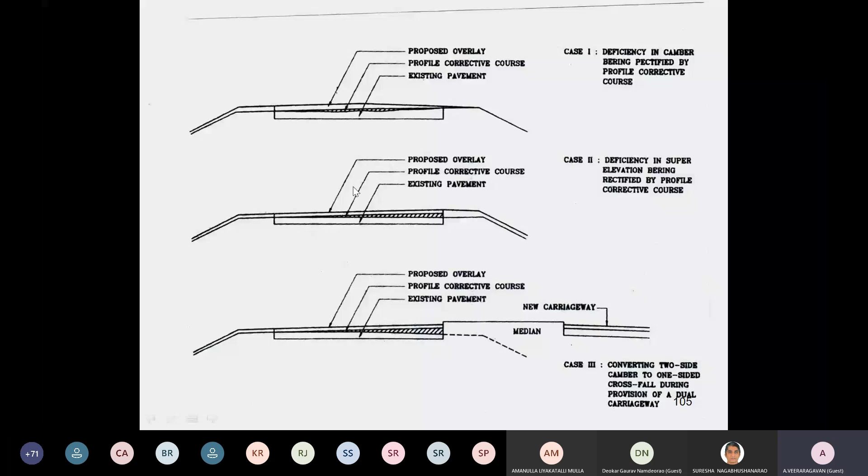Otherwise, when you convert a dual camber into a single camber, all the water will get accumulated here. You'll find cracks on the surface. So surface preparation plays a very important role. And the corrective course, this is the correct method of doing the profile corrective course, not like this. This is the incorrect method. Layer by layer, you should compact before you come to the top.

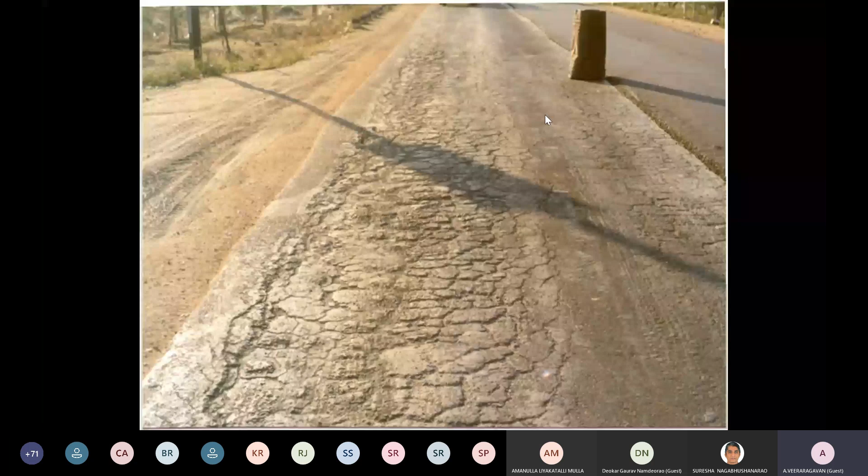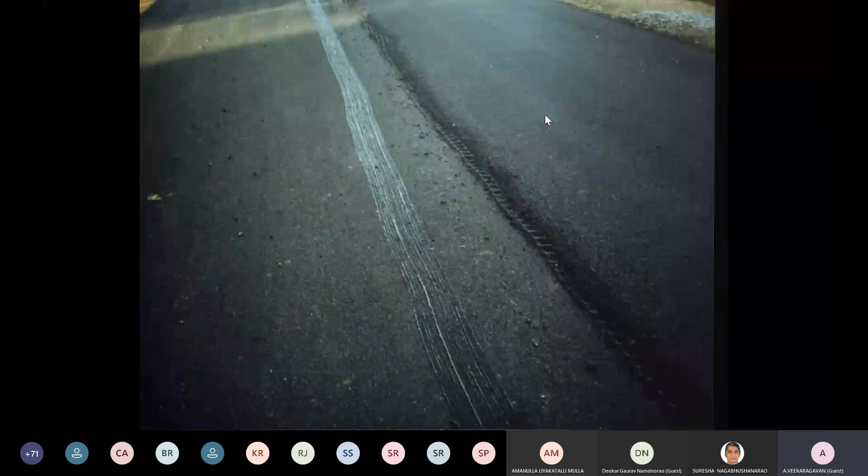And when you find that the surface has extensively cracked, fatigue crack, because of a delay, what is to be done? When they provide a thin SDBC, thin BC on the surface, the same crack will get reflected on the top. So what is the treatment here? If you want the life of the pavement to be extended, you provide a geofabric with a geogrid. Or you can have a geogrid also. But it requires a thick bituminous layer of thickness minimum 75 millimeter. So this geogrid layer will take care of the relative movement and then ensure that the crack does not propagate to the top. So this is called reflection cracking. To retard the reflection cracking, you should provide a geofabric with a geogrid with a thick bituminous overlay.

So that even though you design and construct the pavement as per specifications, the pavement prematurely fails. Why? It's a case of a highway which prematurely failed in 3 months. They spent 2,400 crores to construct the road, but the road failed in 3 months because of many factors. The road was opened, the construction was completed sometime during April, May. I went in September. Only June, July, August, 3 months, I could find potholes. So you find that BC 40, DBM 120, WMM 250, GSB 200 and 500. But the road which was looking nice like this has become like this.

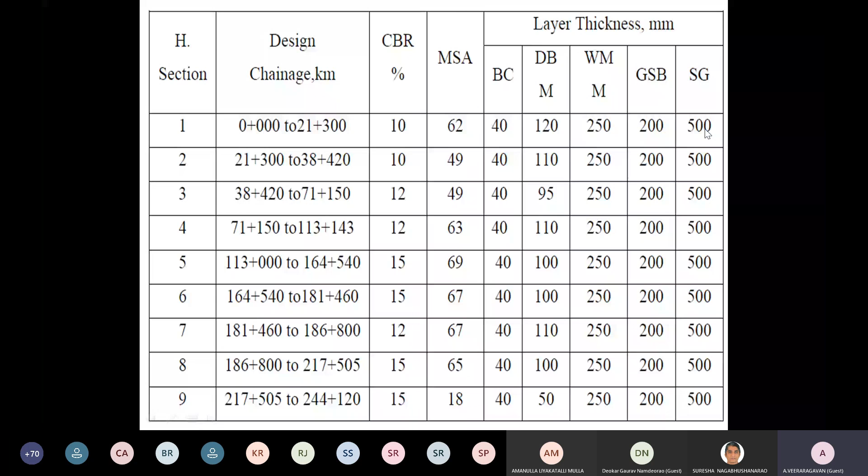So what I mean to say, before I conclude, is that quality plays a very important role. It's not the mix, it's not the choice of the mix. Unless you ensure good quality, the pavement will prematurely crack like this, potholes will form, and in 3 months' time, the pavement has failed. So 130 kilometers of the 240 kilometers failed. I suggested a treatment of milling and overlay in 2015. For 130 kilometers, it cost 130 crores.

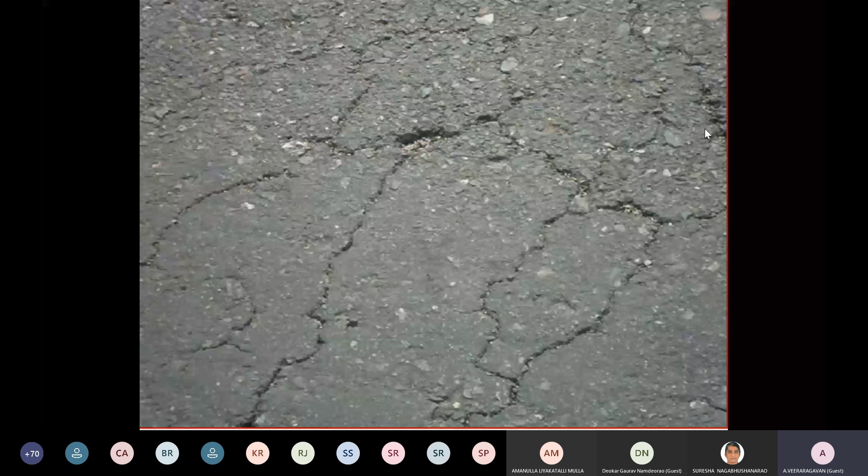They did not do it because they thought that my suggested treatment is costly. They delayed and delayed and delayed, and now they are doing it, but the cost now has gone up to more than 400 crores for the repair only. So quality of construction plays an important role.

So you'll find stripping on the surface. What we found is that you name any type of distress, we could see: open texture, loss of aggregates, hungry surface, alligator cracks, shoving, wheel path depression, all types of distresses we could see in one road because of a combination of several factors.

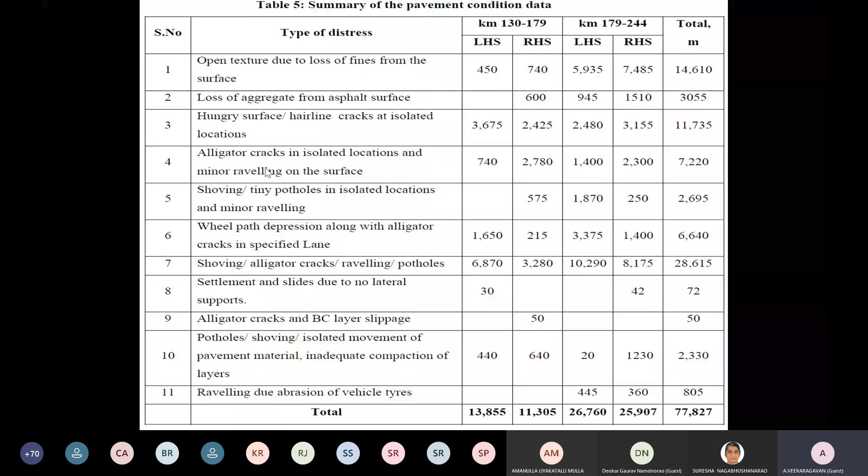So when you try to study what went wrong, you'll find that this is the case of DBM, this is the case of BC. What we found is that in many cases, the DBM layer was poorly compacted. We also find that air voids are more. But we find the binder content was fairly okay. But in the case of bituminous concrete, the binder content was very low. The voids were high. Compaction was poor.

So in a nutshell, if you want a pavement to last longer, you should choose the right type of bituminous treatment, right mix; laboratory mix design and the field mix design all should tally. And if the binder content is low or compaction is poor or air voids are high, the pavement will prematurely fail. So what we found is that when the pavement is compacted to very high density and the plasticity index of the GSB was lower and the density of the bituminous layers are high, no distress. When they were poorly constructed or the plasticity index became more, you will find distress. So quality control of all the layers plays an important role on the performance of the pavement.

So theoretically, you can design a mix. Theoretically, you can predict the performance in an asset management system. But what I want to emphasize at this point of time is that construction quality should also be factored in the performance prediction models. Theoretically, it may last for 15 years. Theoretically, the overlay may last for 10 years. But if the mix is poor or the lower layers are not properly constructed, the life can come down from 10 years to 4 years or 3 years or even 3 months. So your prediction model plays a very important role in road asset management. Considering quality should also be factored.

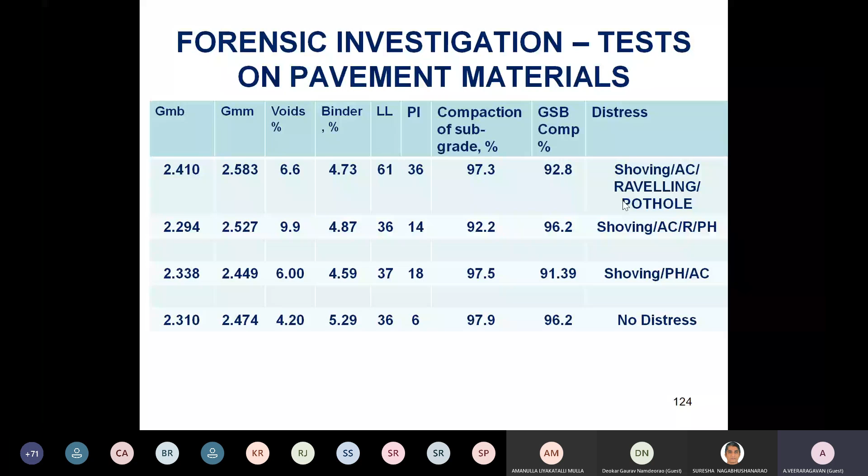So I thank the Ministry of Road Transport and Highways and the Indian Roads Congress for the information literature which I got. So to summarize, there are different choices of bituminous mixes. One is corrective maintenance, other is preventive maintenance. Among these, again, there are different choices. The choice of the treatment and the construction quality plays a very important role on the performance of the pavement. So with that, I conclude. If you have any questions, I'll be very happy to clarify your doubts or any clarification that you need. It's open now for discussion.

I think I have not gone beyond time. It's only just within my time I have completed.

Thank you, sir. Few of the participants have raised their hands during your presentation. Probably they have some doubts. They can raise the hand, they can unmute and then ask. Yes. Namaskaram, sir. This is Vishnu from NIT Warangal. Yeah, tell me. Go ahead.